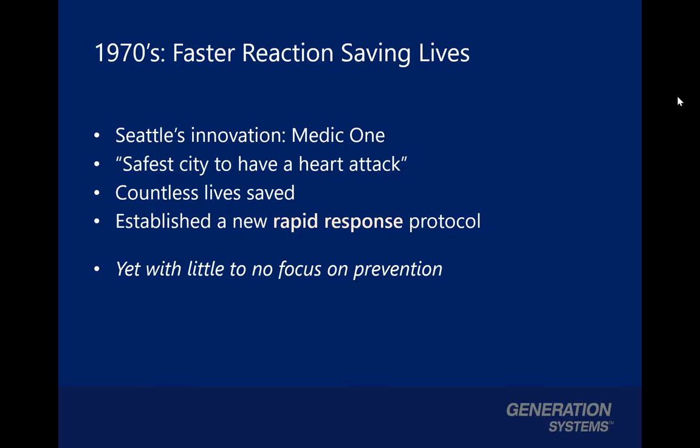The medical community was completely focused on increasing survival after a heart attack, and they were quite successful at it. Yet notably missing was the focus on preventing the heart attack in the first place.

What's changed? Just pay attention to any of today's media, TV, radio, magazines, and the web. You will quickly see that the medical community now leads with a proactive approach built on a foundation of improved lifestyles, healthy diets, and regular exercise.

Yes, programs similar to Seattle's Medic One are now spread across the nation, and cardiac treatment has improved significantly. But it's clear, the primary focus has shifted to proactively avoiding negative outcomes in the first place.

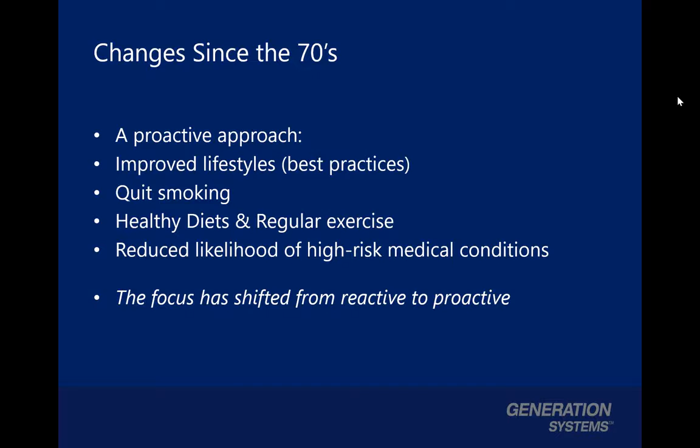What the heck does this have to do with maintenance? The primary focus of maintenance seems to be where medicine was 30 years ago: rapid or early reaction to failure.

Now, here's why I say this. Over the years, I've learned a good way to understand market trends is to follow the money. Starting about 10 years ago, the primary marketing and advertising focus was just beginning to shift from CMMS EAM systems and towards condition monitoring and predictive maintenance products. Today, the majority of commercial promotion in maintenance magazines, conferences, and websites is for predictive type products.

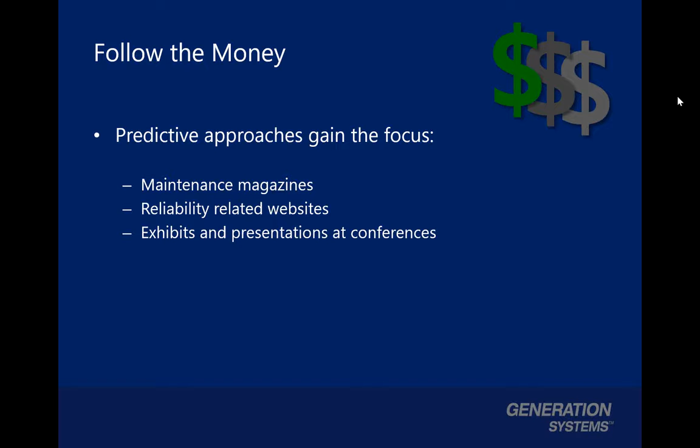When walking through an exhibit hall, I've noticed that most booths are offering some of the same forms of predictive maintenance or condition monitoring, such as vibration analysis, oil analysis, infrared, along with consulting and services on these methods. Of course, there's other offerings as well, but the majority of dollars is spent on promoting predictive products. Let's be clear.

I'm not against predictive methods. They're invaluable. They provide maintenance staff with valuable insights and help avoid costly downtime. The fact is, most plants have invested in one or more predictive maintenance products, such as vibration analysis.

Unfortunately, with the pressures maintenance professionals face today, the use of these products often boils down to minimizing the impact of failure through early detection. So back in the 70s, medicine was focused on reducing pain, suffering, and loss by improving response. Today, it seems maintenance is in a similar place, and in many cases, reacting to failure has become the accepted norm.

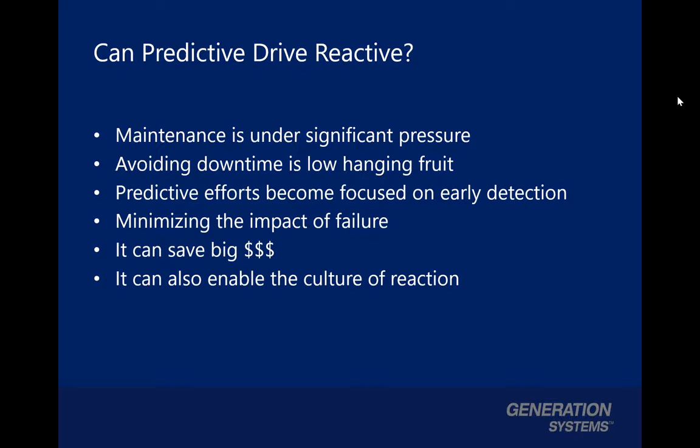In recent discussions, I was told of a maintenance equivalent to Seattle's Medic One program. This plant was very proud. They've reduced downtime by creating 4 specially trained crash teams, providing 24-hour rapid response to equipment failure.

Look, in my job, I talk to reliability engineers every single day, day in and day out. That's what I do, and I love it. And it's from these discussions that I found a very important story. I regularly hear of problems and failures

related to lubrication. This is firsthand from you guys, from the guys that I talk to. Granted, a few share they don't have these types of problems, and after a few minutes I believe them, because they describe a plant that is taking these foundational issues seriously. But in most cases, when I ask the question, are you having any lubrication-related failures? Most often, the answer is yes.

The second question I ask is more for fun. Do you have much reactive maintenance time? It's not unusual for the guy to say to me, and he starts laughing, he says something like, are you kidding me? Of course we do.

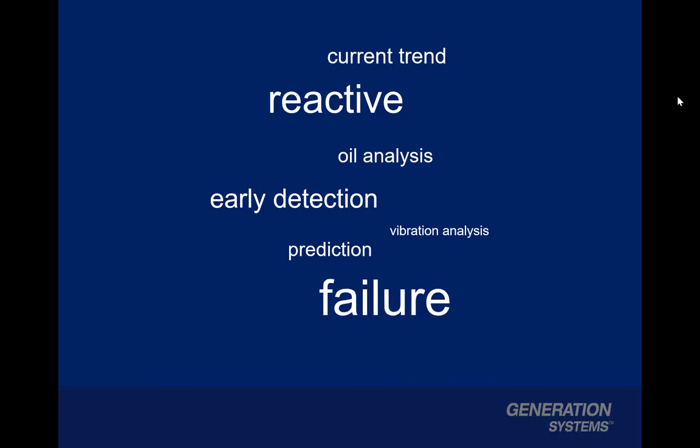Multiple studies have shown poor lubrication practices to be the leading cause of equipment failure. Bearing and equipment manufacturers agree. At the 1995 TAPPI Engineering Conference, it was reported that 54% of failures were lubrication related. Then in 2014, Ken Bannister's State of the Lubrication Nation report set this figure at 70%. Using data from an earlier study by MIT, Bannister also claimed the annual loss from lubrication was about $1 billion.

Now, the figures may change depending on who's making the claim, but whether the figure is 30%, 54%, or 70%, the cost of lubrication-related failure is far too high.

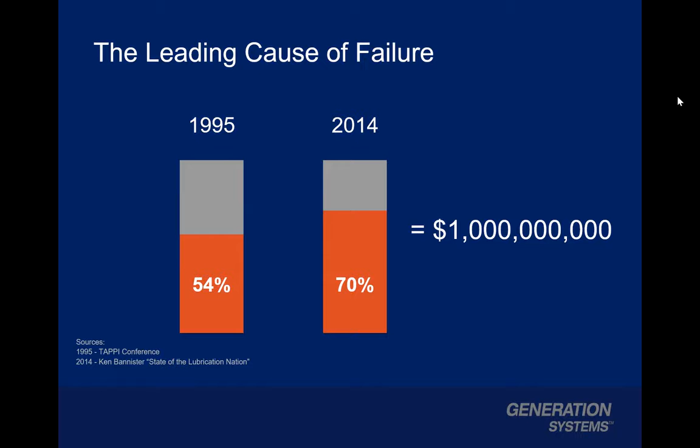Bannister's State of the Lubrication Nation report also included a detailed survey of lubrication practices. The picture painted wasn't overly attractive. For example, only 12% of lubrication personnel from all industrial sectors are professionally certified. Lubrication is often left to millwrights, electricians, machine operators, or the newest employee. And when things get tight, the lube tech is the first to go.

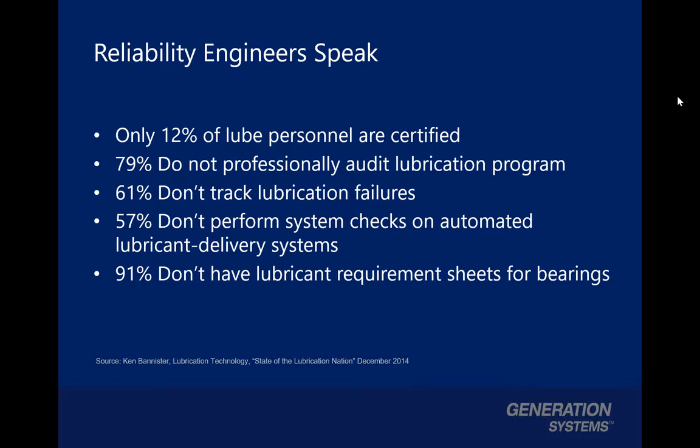The reality is, this information in this report came from you. Now, Bannister's a great editor, and he's really good at putting statistics together in the story. But the fact is, you guys know these problems. Yet, from the facts presented, it would seem lubrication is not emphasized by management.

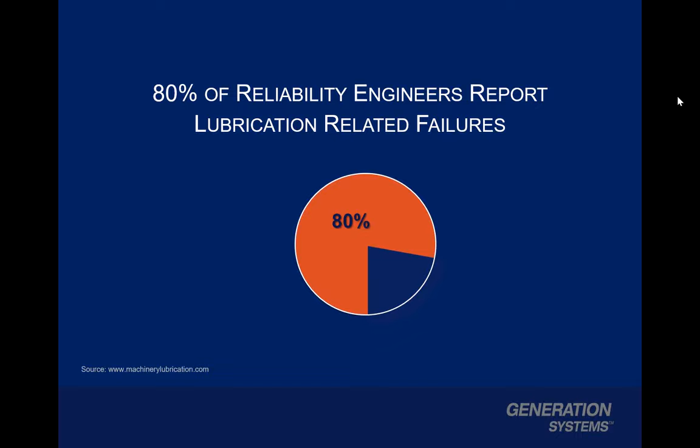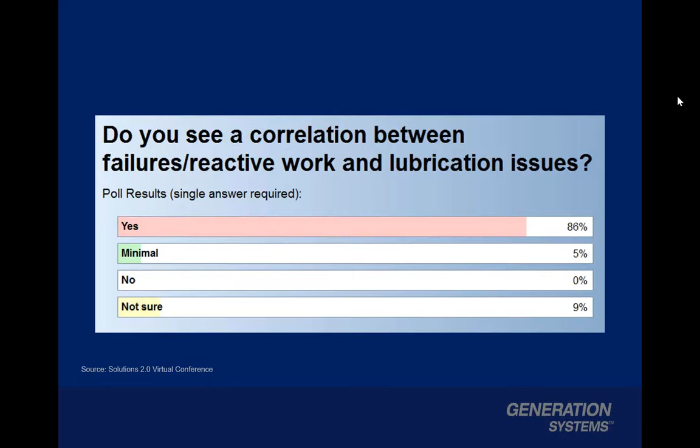In an online survey by MachineLubrication.com, over 80% of reliability engineers indicated they experienced lubricant starvation. In a live poll in a recent online maintenance conference, over 85% of the respondents saw the correlation between lubrication issues and the level of reactive maintenance.

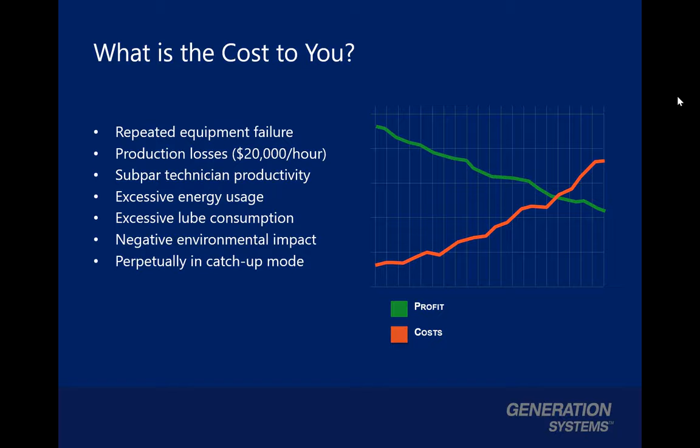But what matters most is how are lube-related problems affecting you and your company? Do any of these challenges sound familiar to you? Chronic equipment failure, production losses, subpar technician productivity, excessive lube consumption, and higher energy, maintenance, and environmental cost.

Considering all of the data, it seems sensible to ask ourselves, are these results really acceptable? If the answer is no, then there's a second question we should ask: are the currently accepted lubrication practices and control methods really working? And if the answer is no, then it's worth exploring some of the key reasons why.

The first major reason is management not recognizing that lubrication is a unique maintenance discipline. Most everyone sees oil analysis and vibration analysis as unique disciplines. They need specific data, tools, training, and software. Yet lubrication is often viewed as simple. You know, a grease gun on a fitting. How hard is that? Oil is oil, right?

Management sees that someone is doing lubrication and just assumes all is okay. I read an interesting book, RCM, Gateway to World-Class Maintenance. I thought to myself, man, these guys really know what they're talking about. And I couldn't wait to get to the chapter on lubrication. You want to know something? It wasn't there. The word lubrication wasn't even in the index. The authors even took lubrication for granted.

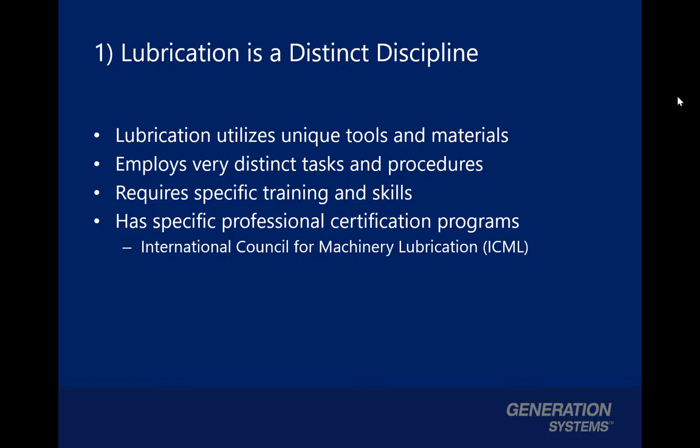Another reason is not realizing the complexity and detail of the information lubrication requires. There are 5 core data elements used to specify lubrication requirements: components, lubricants, task types, procedures, and frequencies. Interestingly, defining a lubrication requirement of a single conveyor requires 7 different combinations of these elements. And specifying the lubrication needs across the plant will need between 100 and 200 different combinations of these data elements. Knowing what needs to be done and when is actually very, very complex.

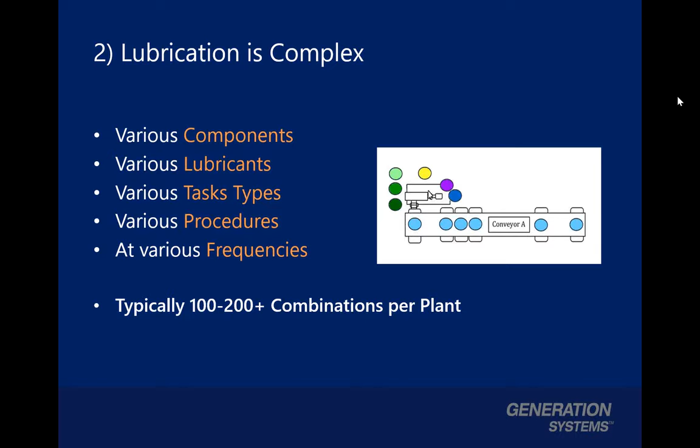CMMS systems may seem like the answer, yet many tell us the thankless job of trying to shoehorn these details into a PM work order gives them limited capability and makes simple changes extremely difficult.

Another reason comes from not understanding the sheer number of lubrication tasks to be performed on an annual basis. With weekly tasks needing 52 visits per year, monthly tasks requiring 12, and so on, once you do the math, the numbers are almost unbelievable. From approximately 70,000 tasks per year for a small plant to over 500,000 for a large plant. I even know of one paper mill that is tracking 720,000 tasks a year. This plant-wide labyrinth of tasks is a logistical nightmare.

Now, think about it. Can spreadsheets or PM work orders really give the control and logistics needed to accurately and efficiently keep up with this volume of work? I don't think so.

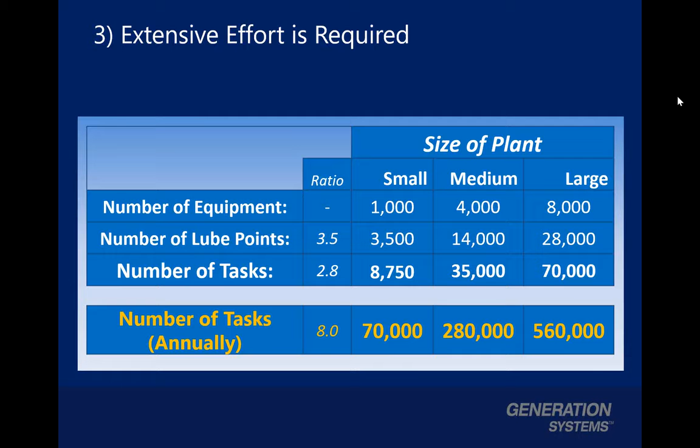Consider this: with PM work orders and lubrication, maintenance departments regularly deal with many corrective work orders. Now imagine if your work order system would randomly close some of these work orders each week, even though the work was not completed. Would you let that happen? Of course not. But think about it—this is exactly what happens with PM lubrication work orders.

You ever noticed that lubrication work orders are turned in with 100% of the tasks complete? Why is this? Well, it's simple. The lube tech is no fool. He knows the system forces you to clear the entire work order. So random tasks are cleared, even though the work wasn't completed. You lose this critical information, and it compromises control of your work week after week. And the problem compounds—the larger the plant, the greater the problem. Lube tasks are routinely missed.

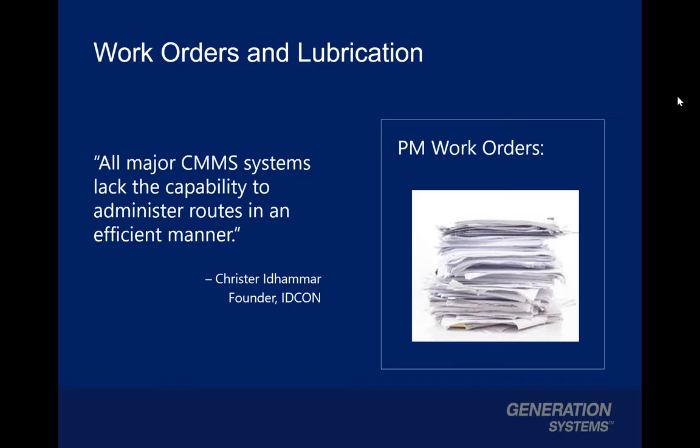he was completing 95% of his lubrication tasks each week. I called John and congratulated him. I asked him how he did it. He said he would tell his team to make notes each week on lubrication tasks that weren't in the most efficient walking sequence.

He told them it didn't matter if the task was 10 feet or 2 inches out of sequence—make a note. Then he would have a meeting at the end of each week using the software's unique drag-and-drop capability. He kept improving the route until he achieved his 95% goal. Other plants with the same tool report they're completing about 80%.

So think about it. If between 5 and 20% of lube tasks are missed with a tool that is specifically designed to make sure you got those tasks, does it make sense that just clearing an entire lubrication work order makes sense? It doesn't.

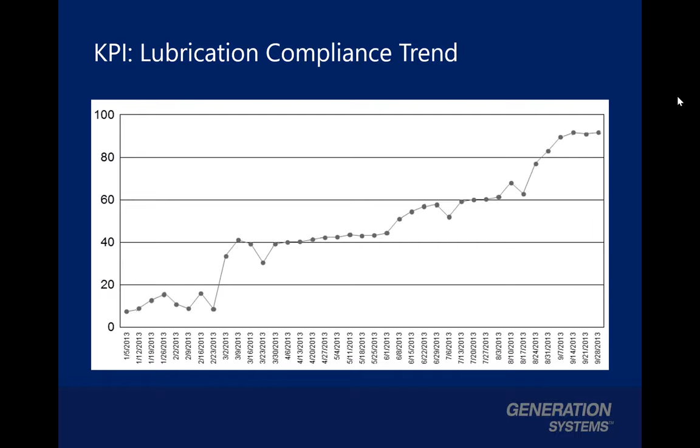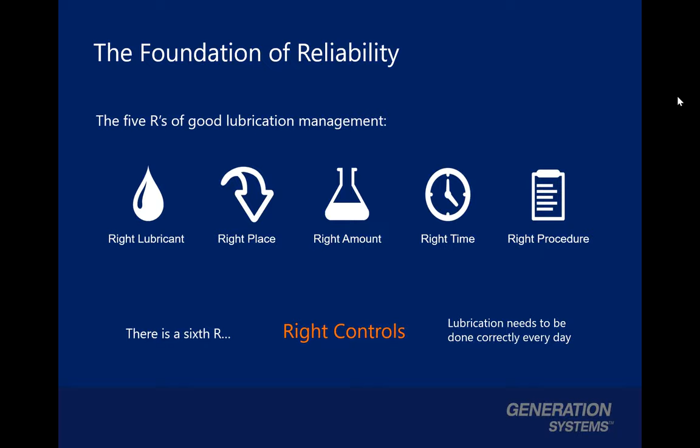Lubrication is the foundation of reliability. Why? Because lubrication is 100% proactive and significantly reduces reactive maintenance. It requires applying the right lubricant at the right time, in the right amount, at the right place, with the right procedure, and with the right controls. You have to make sure it's relentless—you have to do it every single day.

My suggestion is to view lubrication as an opportunity, not a problem. It doesn't have to cost a lot of money to solve this problem, because you already have almost everything needed to make the change and save millions of dollars. You have equipment, staff, and lubricants.

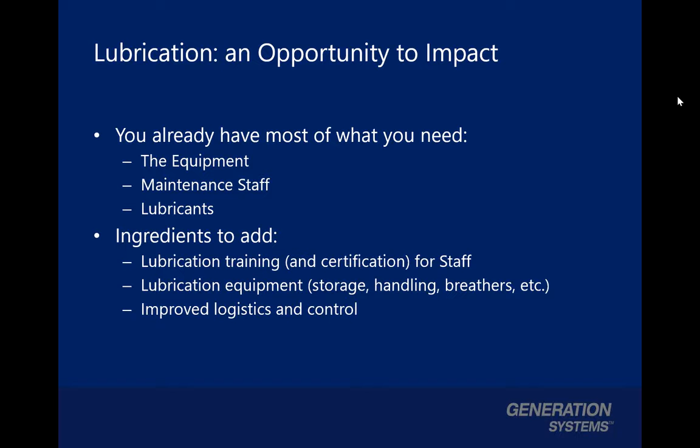What else is needed? First, add lubrication-specific training to increase staff knowledge and best practice skills. Second, provide the needed lubrication tools and equipment. Third, improve your logistics and control of lubrication through a well-designed software program. The increased accuracy, effectiveness, and efficiency of your lubrication program will improve uptime, reduce costs, and improve the bottom line.

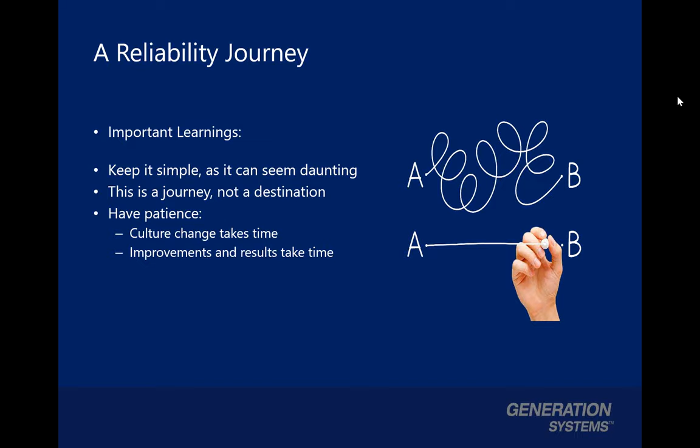We have proof of this. There is a plant that's done it with spectacular results. Looking at lowering costs, they started a foundational approach to maintenance that included a host of lubricant practices. They implemented a well-thought-out plan. They understood it was a journey, not a destination. It required a change in their maintenance culture.

They created a plan, introduced it, and worked it to get buy-in from management down to the lubrication tech. Education and training was the beginning of the change. They started the program small and built on each success. The small steps gave them early wins that they could celebrate.

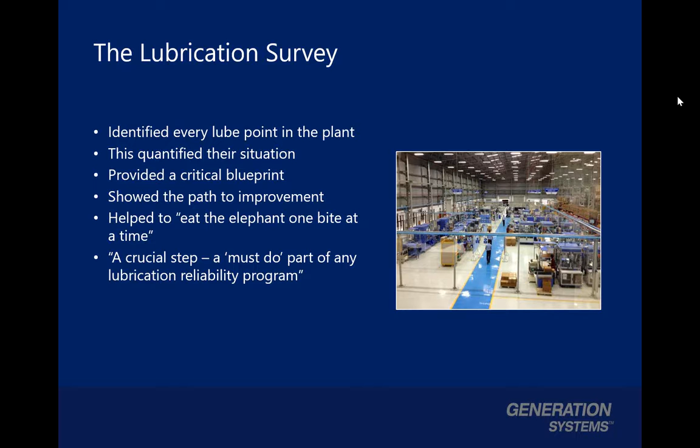They understood they needed to identify every single lube point and recurring task in their plant, and that information needed to be in the computer as a separate, searchable data point—not on a spreadsheet or in a text on a PM. They organized their lube room. They started filtering lubricants when they received it from their supplier, and again before adding it to their equipment.

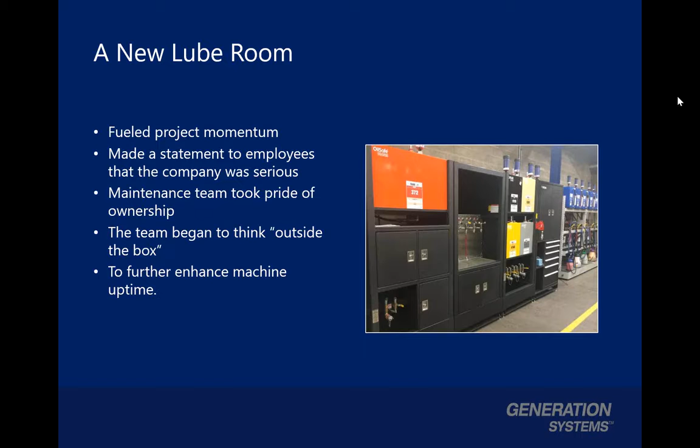Employees soon realized the commitment of management, and then they took pride in their work. They felt comfortable bringing their ideas for improvement to management. They invested in color-coded containers, clear grease guns, breathers, filters, sight glasses—all added value. The net result: they gained efficiency. They had a cleaner factory and fewer mistakes.

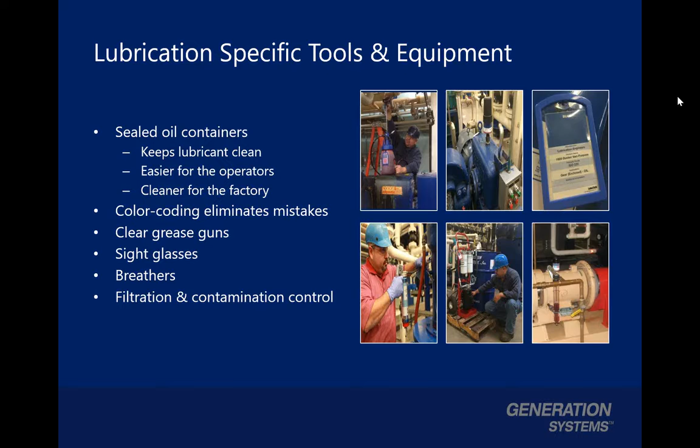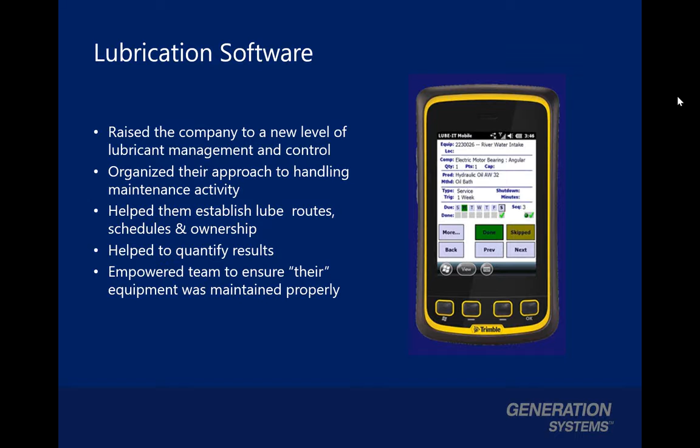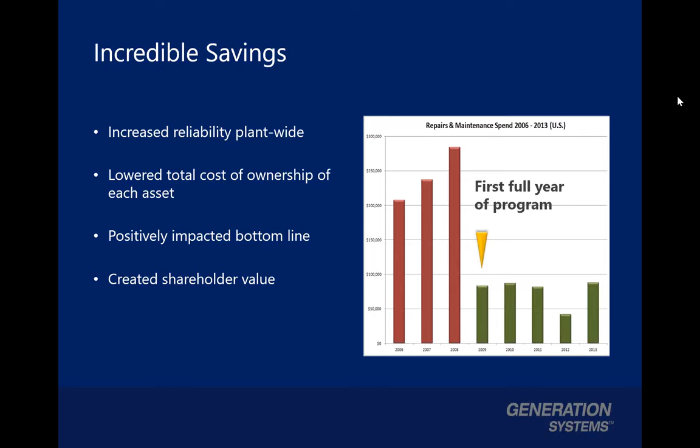They added a task-specific lubrication management software system. It helped them establish efficient routes. It was the backbone of the improvements they made. It brought the needed control. They created incredible savings by changing to a proactive mindset that views lubrication as the foundation of reliability. The result: they had a healthy bottom line and real shareholder value.

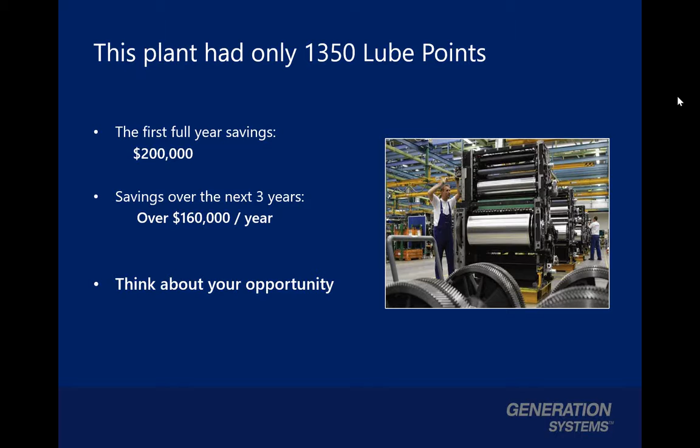They saved $200,000 after the first full year of operating under their new program. This was a small plant—they only had 1,350 lube points. Your opportunity to increase profits is incredible. Do the math: 1,350 lube points, a savings of $148 per lube point. How many lube points are in your plant, and how much would you save?

This plant's not alone. Here are some additional success stories of plants implementing this foundational approach to maintenance.

Let me introduce you to Tammy Needham. She's a welder, and then management decided to put her in charge of lubrication. Soon she realized it was a mess. There was wood shavings soaking up oil all over the plant. The first thing she did was clean up the shavings and put drip pans down.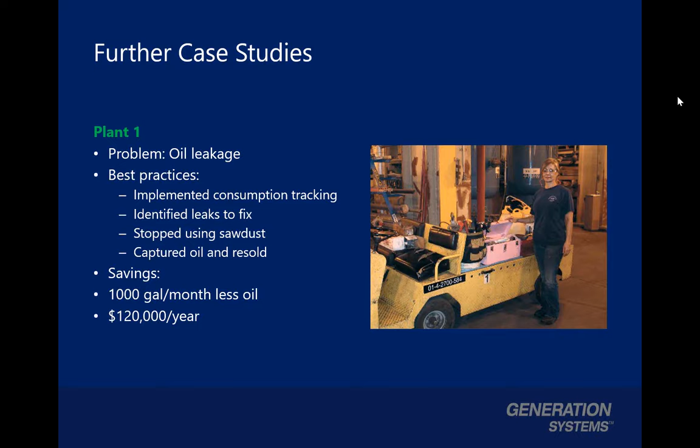The plant was being charged for hauling off environmental hazard. Now she was getting 50 cents a gallon for used oil. Her software tool had a consumption tracking feature, and with it she was able to identify the leakers. She immediately issued corrective work orders and soon had them all under control. She saved $120,000 a year just on oil purchases. Based on this and other foundational changes she made, the organization deployed her solutions throughout the entire organization.

The second plant I've already told you about with the KPI chart. When John emailed me with his results, I called him and asked how many employees he had to hire to get these gains. He told me none, because he was getting about 50% more efficiency from his lube techs. He had an outside contractor regularly helping them keep up with lubrication, but soon he was able to let the contractor go, and he saved $70,000 a year.

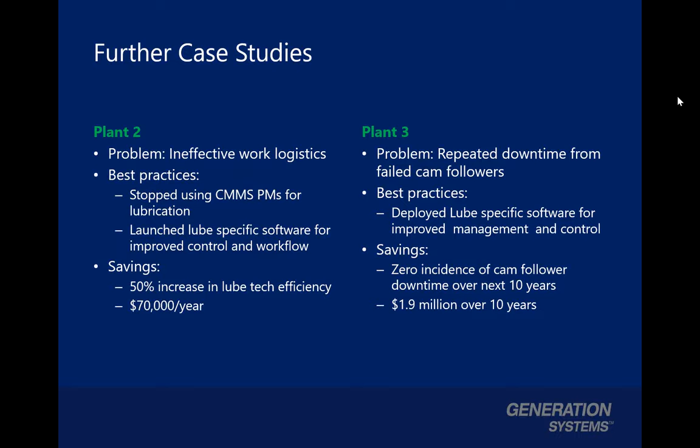The third plant saved $1.9 million. Seeing lubrication as foundational to its reliability, they had a long history of downtime related to failed cam followers. With improved management and control of lubrication, they had zero cam follower failures over the next 10 years.

Going back to my follow-the-money thought, change is on the horizon. A tipping point's coming. It's happening - not big, but change is happening. It's starting with desiccant breathers, sight glasses, contamination control, ultrasonic grease guns, cleaning up oil rooms. These can all be classified as proactive and indicate the shift in focus towards prevention.

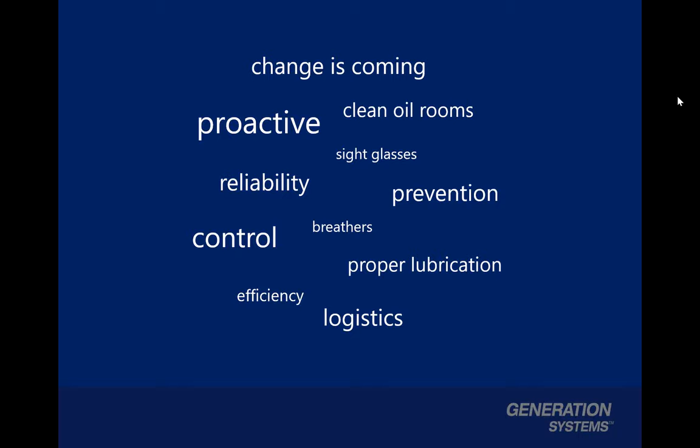Keep your eye out for it. The more promotion and advertising you see of these solutions, the faster this improvement and important change is going to come. So I really appreciate your time. That's sort of the end of my discussion.